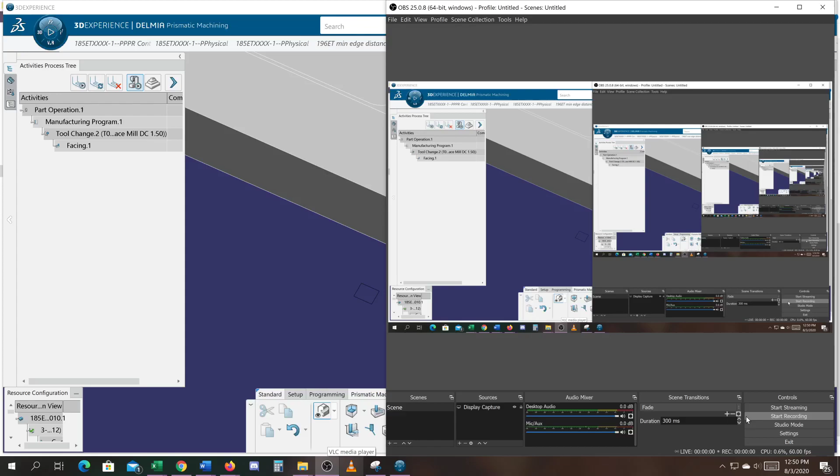Alright, in this demo I'm going to attempt to counterbore that hole. So you don't just take a drill and drill a big hole. What you do is you basically bore it out, or we use the pocketing command to do a boring command to remove material as if it were a pocket.

So what I taught you earlier is you could go to pocket, and remember you got to have manufacturing program 1 active. And then I taught you to go ahead and grab that bottom face and then grab this bottom.

But did you see how that red circle highlighted on the inside? So it's going to think it doesn't want to pocket that. So when you follow through with this and grab the top of the face, by the way, I hid my rough stock. If your rough stock's in the way, make sure to hide that.

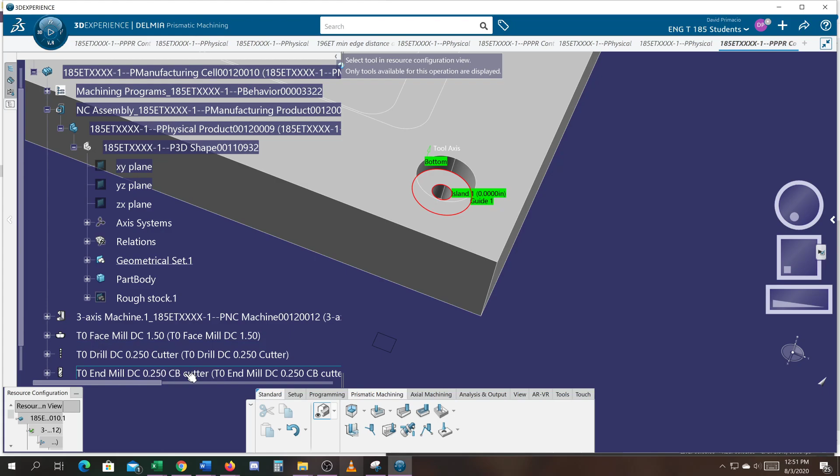Now I got to magically find that close button. Oh, what do you know? I got it. It's all closed off now. And then I'm going to come over here and I'm going to pick the cutter from the list. It's this one here, the one that I put counterbore on. And it says it's good. It's all green.

And I will hit play and it's going to crash because it doesn't know what to do with that red inside circle. Okay, so I'll clear that out and then come back to this mode.

Instead of grabbing the bottom first, what I'm going to do is... actually, now that I'm thinking about it, let's just cancel this.

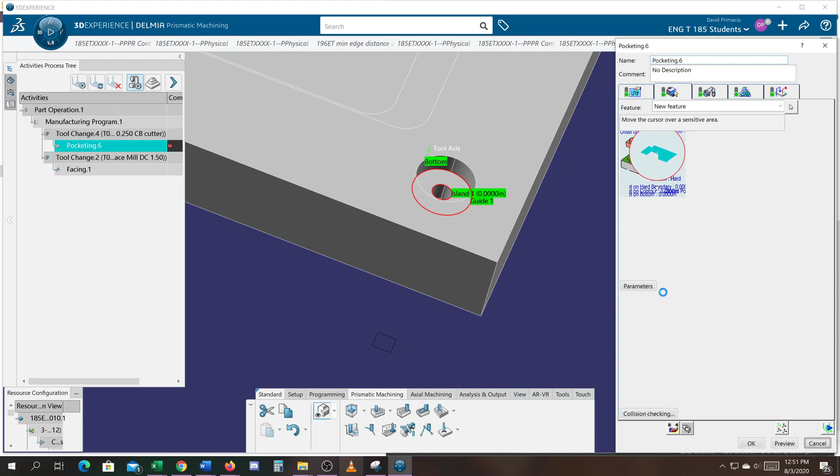I'm going to go back to Prismatic Machining, grab pocketing. I got this tool here. I'm wondering if I can put it inside that tool. Click on that tool so that my tool is already chosen. Okay, click on that one. It was still in there from the last time I canceled out what I was doing.

This time I'm going to grab the side walls and I'm going to grab the edge of that circle so it doesn't consider the inner domain. And then what I had to do, what you have to do is it's asking, do you have any more adjacent elements? You would think it knows it's done because it's a completely closed off circle, but it doesn't. So you got to hit that green check mark to accept that.

And what I did is I created a plane at the same plane as the bottom surface of the counterbore. So when I grab the bottom here and grab this plane, it's still going to work within that circle.

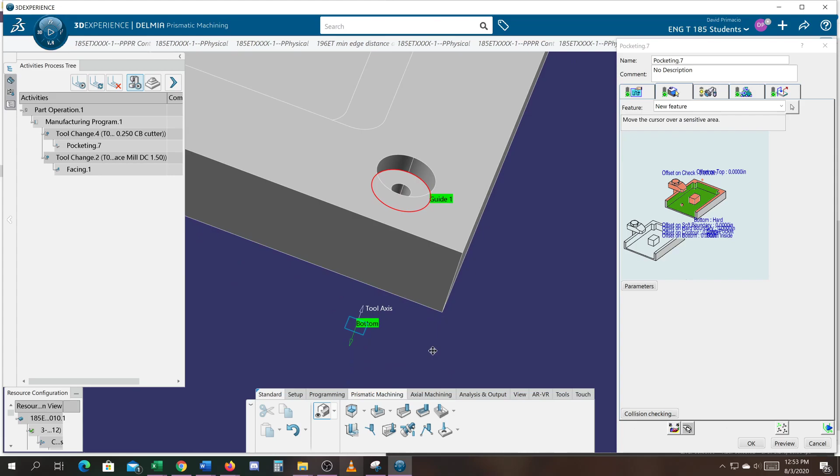Tool axis is pointing up, so that's good. Now the top is the top of that surface, so recognize that outside edge there. Let's put an approach and retract. Normally I pick that rough stock material, but just to make this go faster, I'm going to go and grab that. Okay, and the retract.

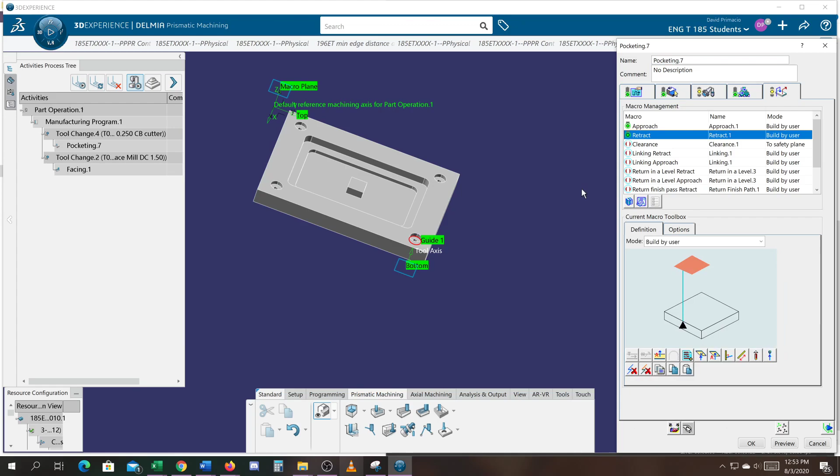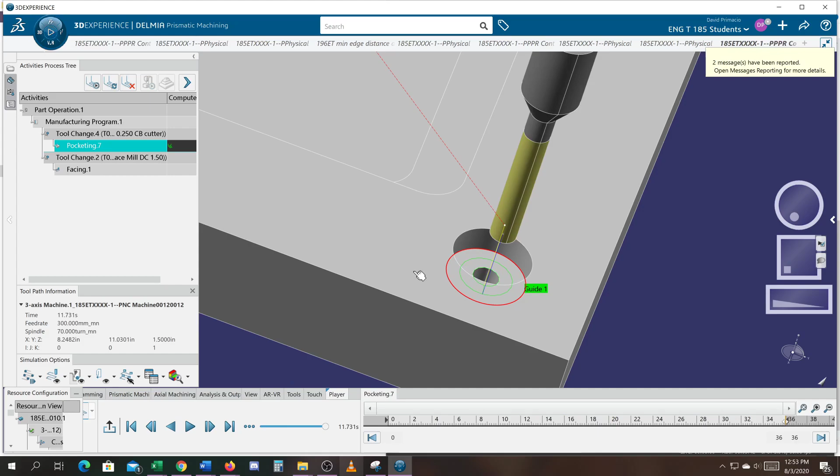Okay, then we have play, and you can see it only seems to make 2 passes and it's done. I increased the size of the circle so we could see what's going on too. Maybe I should have went with the smaller cutter.

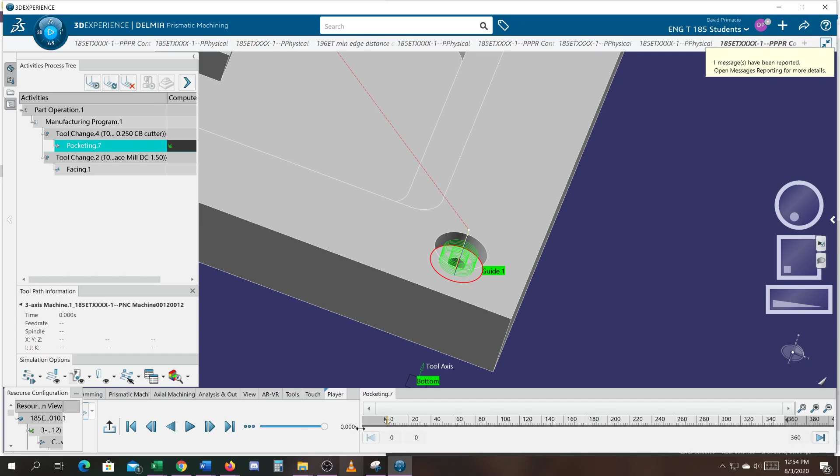I will exit out of this, and under the facing I'm going to make it do 10 cuts just for fun here. Preview that and hit play, and we'll play them cut out here. So you can see it slowly working its way down. It took 10 equal spaces and bored out that hole.

Let's see, am I starting? Yeah, I think it went on the inside and worked its way out. Sometimes it's hard to tell. Let me see if I can find that settings button. Slow this down and hit play. That makes it a little easier for me to see.

I can go ahead and speed it up a little bit. I don't know. Oh yeah, I guess it does. All right, touch the gas pedal there. All right, so that's how I bore out that hole.

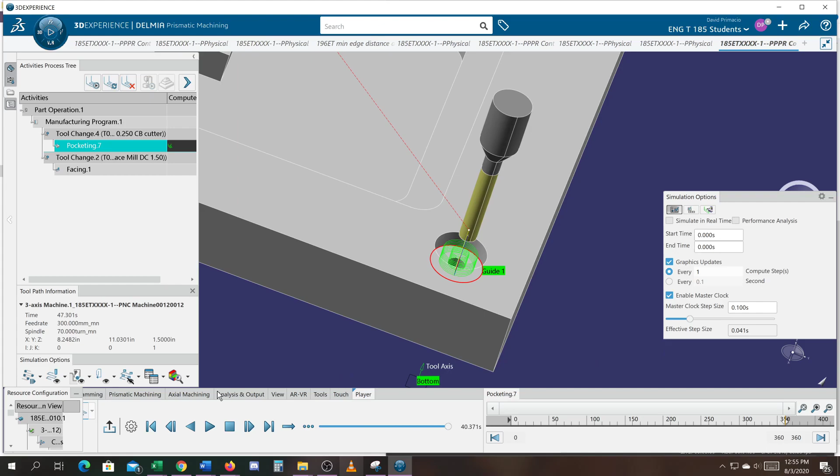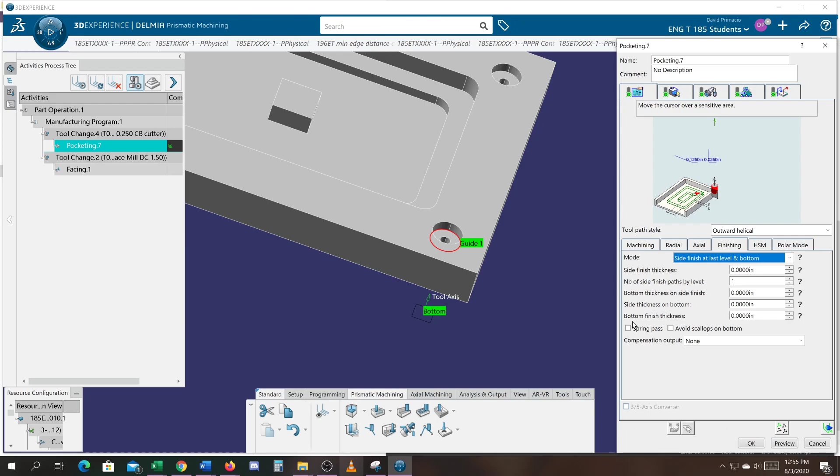Okay, we'll hit exit. And just for fun, let's do a finishing pass. And I'll just do the very last one. So the very last one on the side, at the very last level and the bottom, we'll do a finish pass, which should clean up all the roughness on the outside and the bottom of that, and just make a smooth surface there.

Let's go ahead and hit play. Whew. I think I will adjust that setting to be a little faster and hit play. And I'm just trying to speed it up a notch there. Okay, so that would be a preferred technique of cutting out a hole size versus just drilling, taking a big drill bit and cutting it straight down.

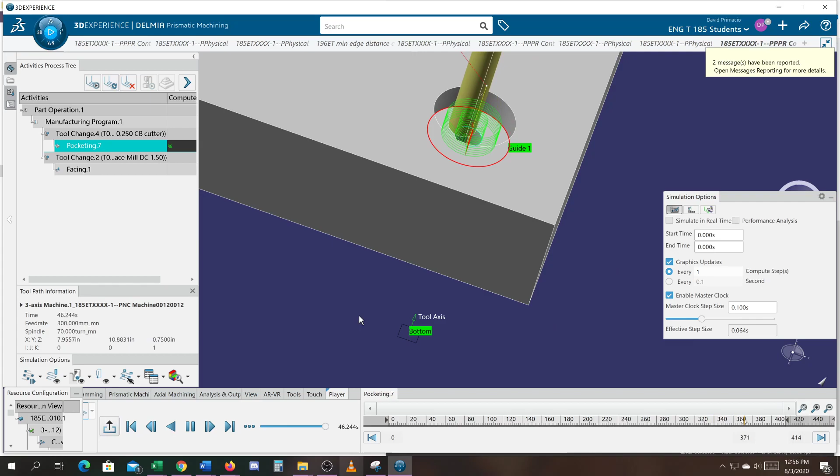All right, so then what we're going to do next, we'll exit out. That's all looking good. Do you remember how to do the other ones? Let's see. We'll go to toolpath, and we're going to pick this one here that I don't think looks like a pattern. I think they should use the same symbol, but or make it bigger. What the hell? It's already taking up all my space anyways.

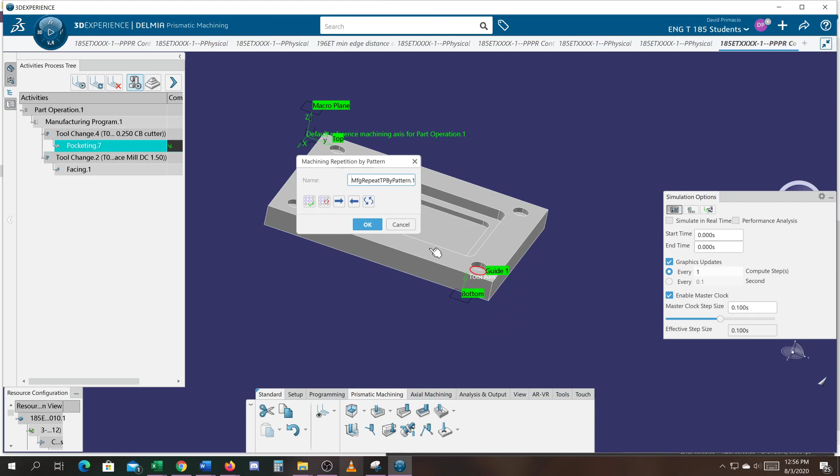So click on that, and then find in our tree the pattern. It finds the 4 bores, counterbore holes. We'll select OK, and let's hit play.

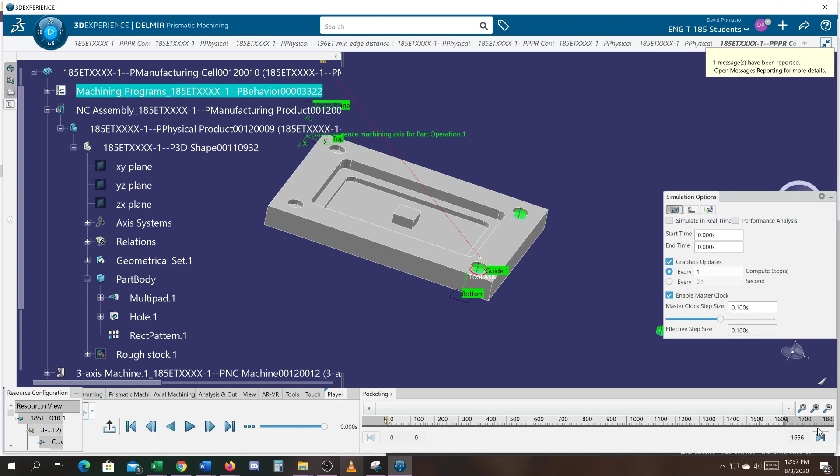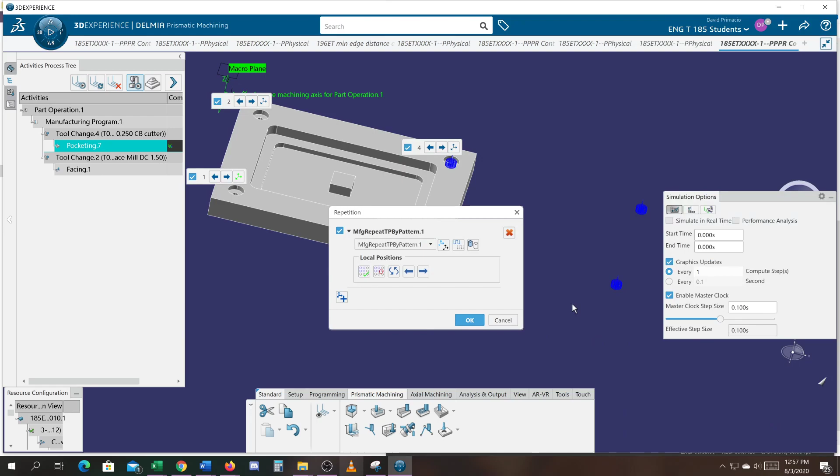Oh no, how did it do that? What happened was when I created the counterbore, I had to inverse it, but why doesn't it know to do that on this one? It's weird because it's showing that it's going to drill those holes out.

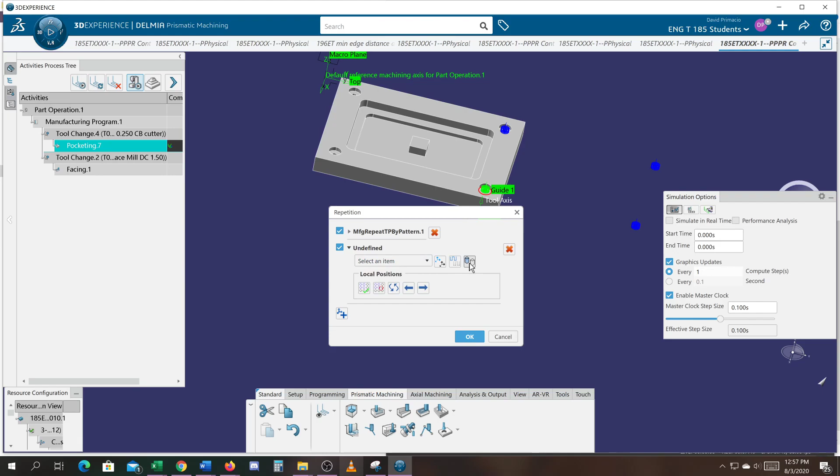I tried to grab that pattern again. It's definitely recognizing where they're at. Oh, I got too many going on. How do I get rid of them now? I've gone crazy with those. How do I remove them? Oh, I see, let's do X, X.

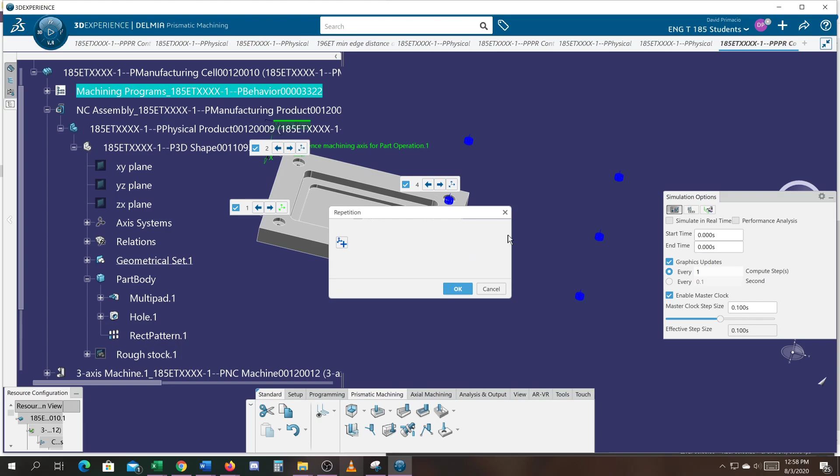We'll add that back, and pick pattern off the tree. I see it's adding 1, 2, 3, 4.

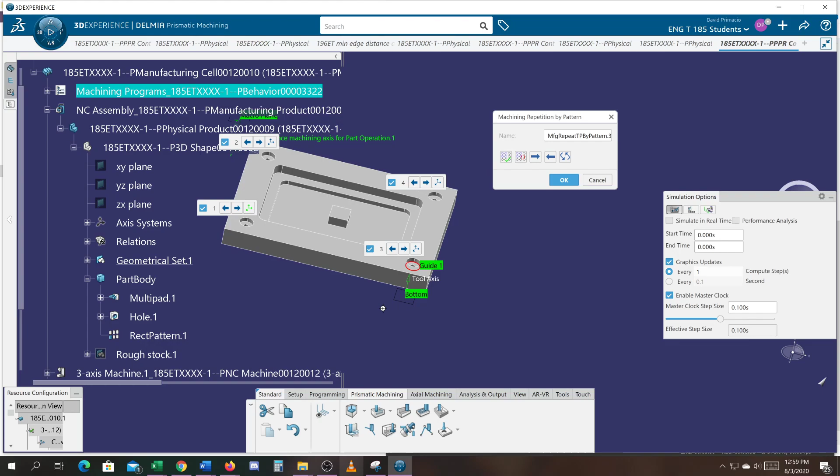Let me try something here. Cancel. I think what I have to do... let this be a lesson learned to everyone.

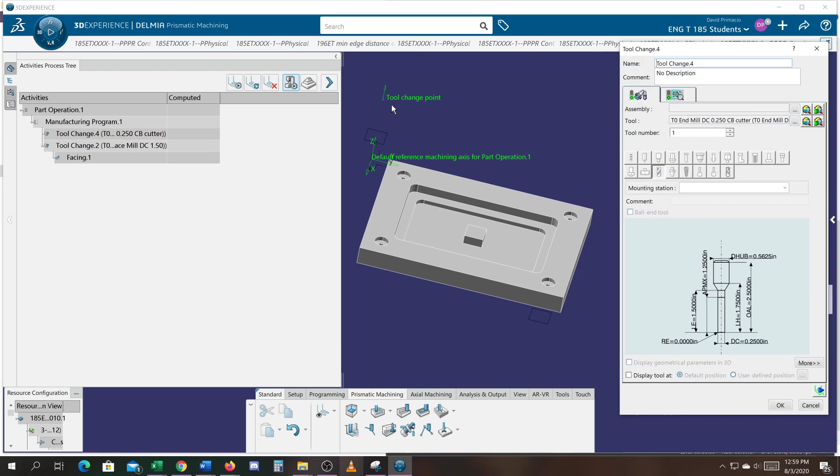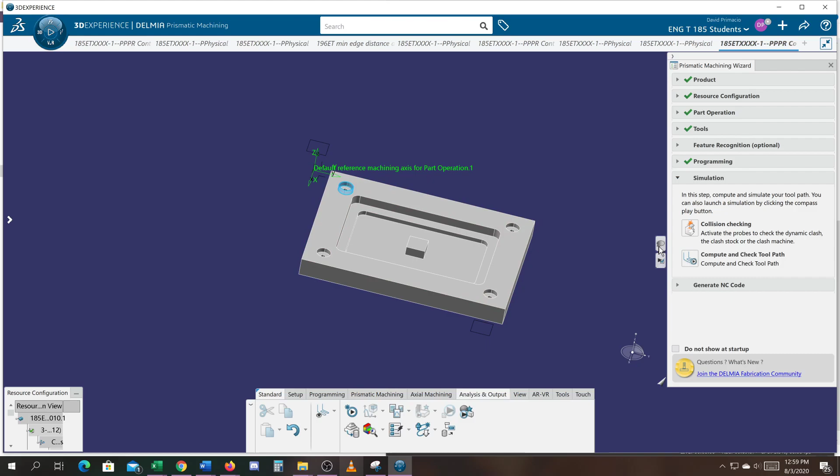I think I drilled this hole, and the pattern goes this way from that hole. I'm just going to go verify that hole. Okay, that hole is this one here, and I machined this one over here. So let me do it again on this one.

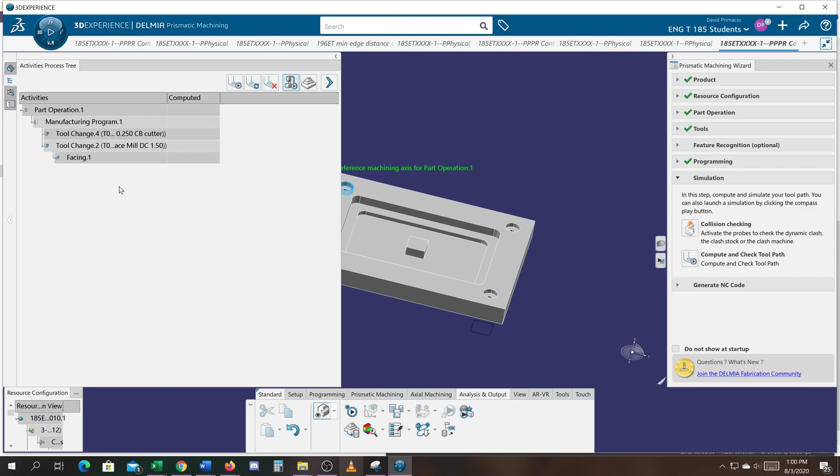Let's delete this out. Select Manufacturing 1. With that active, I should be able to go to Prismatic Machining and do a pocket.

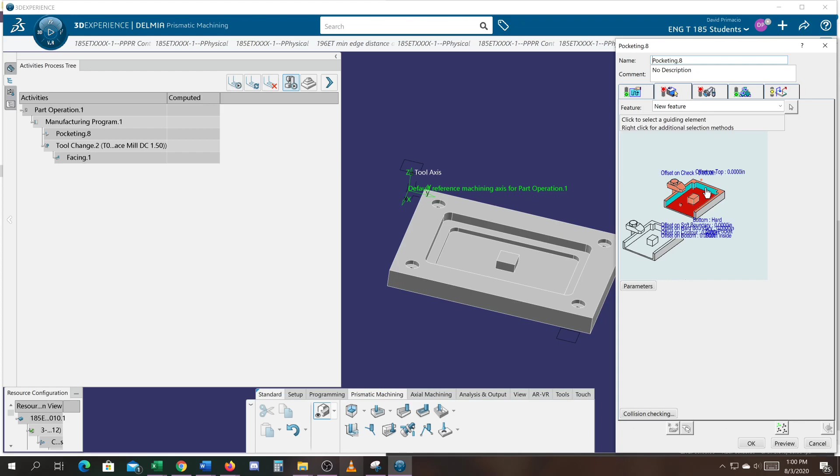To do it right this time, I'm going to grab this wall here, which means to grab this edge here, not that wall. It won't even let me grab the wall. So I grab that edge there so it doesn't recognize the inner domain.

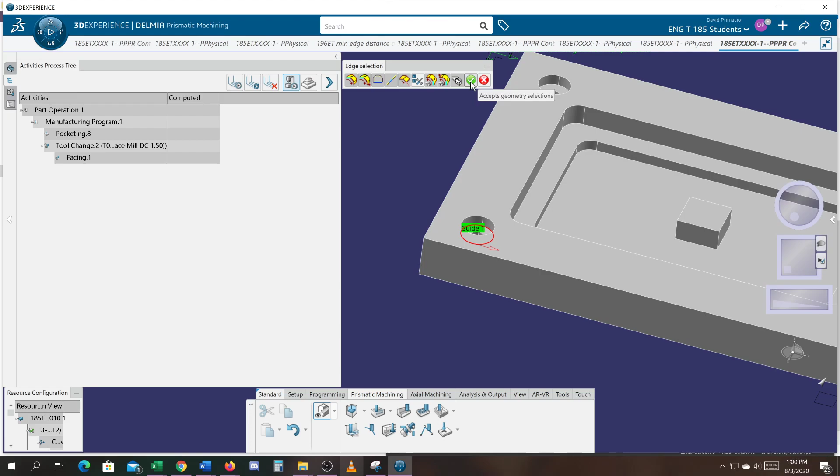I hit the green check to accept that, up there on the very top. This palette here, that green check. Go ahead and hit accept. And then we can grab the bottom. Remember, I created a plane that represented the bottom of the counterbore, and then the top will be the top of this part here.

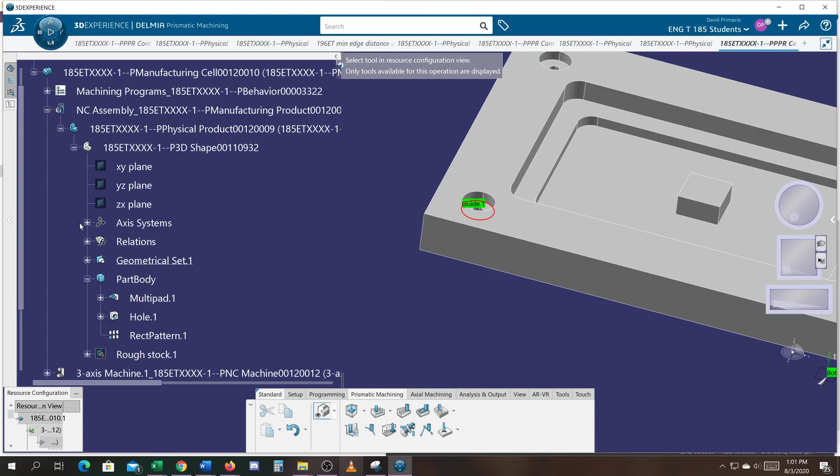Select the tool from the list, which is the cutter, the counterbore cutter. My approach and retract macros, I'll use the same as the safety plane. Again, you might want to use the plane off the rough stock so you're not having to go so high to clear it.

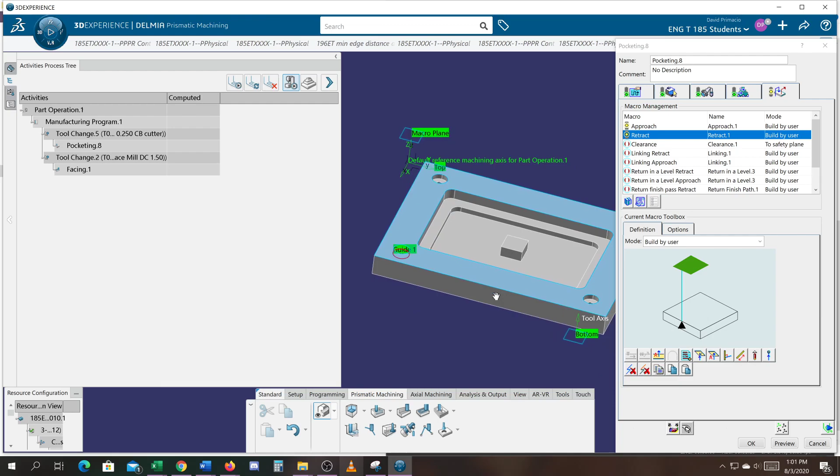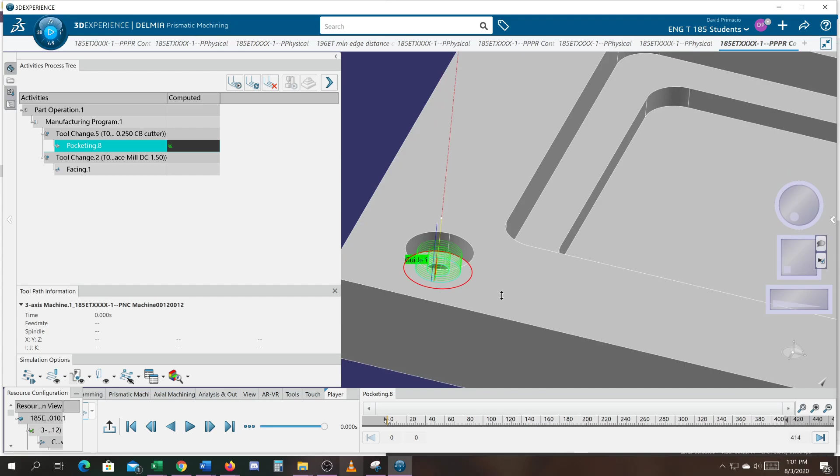Remember, we did 10 levels and a finish pass on this one, the very last one. Let's hit play and see what we get. Alright, that one's working so far.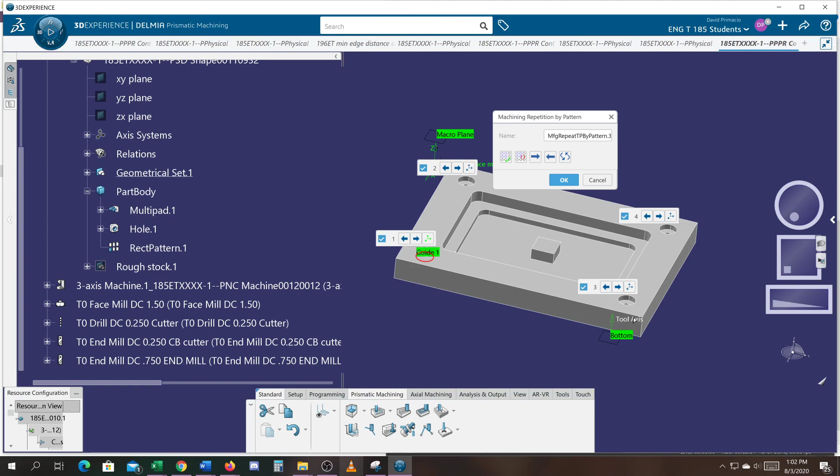So let's go ahead and add down at the bottom here, add the tool path. And then we're going to pick a pattern, right off the tree. The rectangular pattern, 1, 2, 3, 4 holes. The holes look correct. Select OK. Hit OK.

Let's hit play. Oh, this time it's working. Okay, so let's increase the setting, just increasing the speed a little bit. Okay, so we counterbored the holes out.

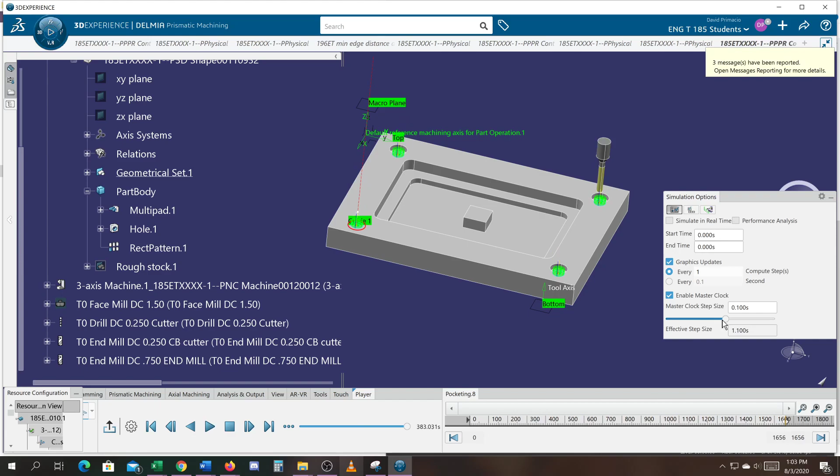Now what we're going to do is drill out the next holes. I'm going to close this off and hit exit. Make sure to say OK, otherwise it won't keep that tool path. Now we're going to drill out the holes. Again, selecting Manufacturing 1, open up the program.

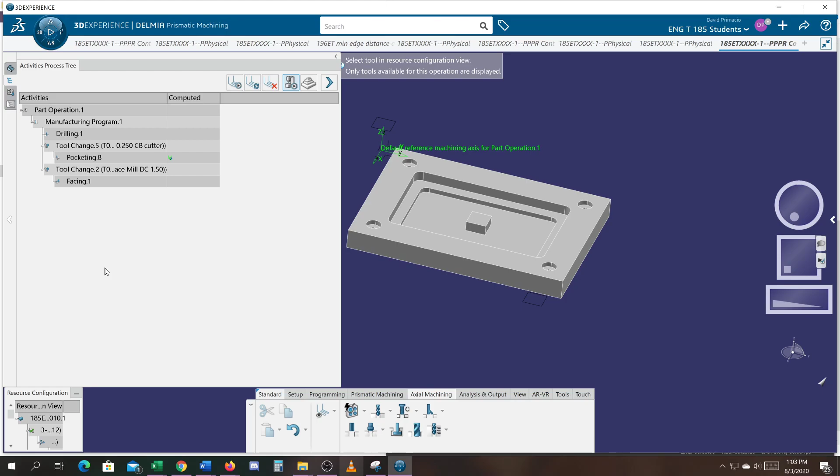We're going to do an axial machining, and I'm going to drill. I wish you'd go to the cutter first - I'm going to do that first, establish my cutter from my list. I'm going to use a 1/4 inch cutter. That one here has the drill symbol.

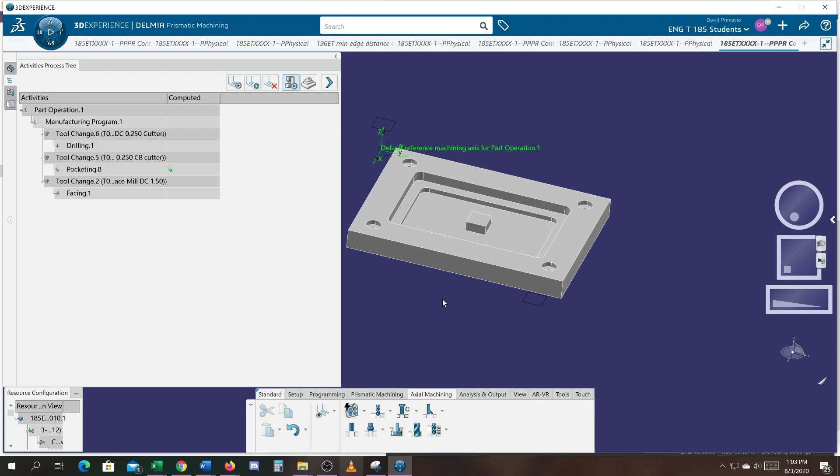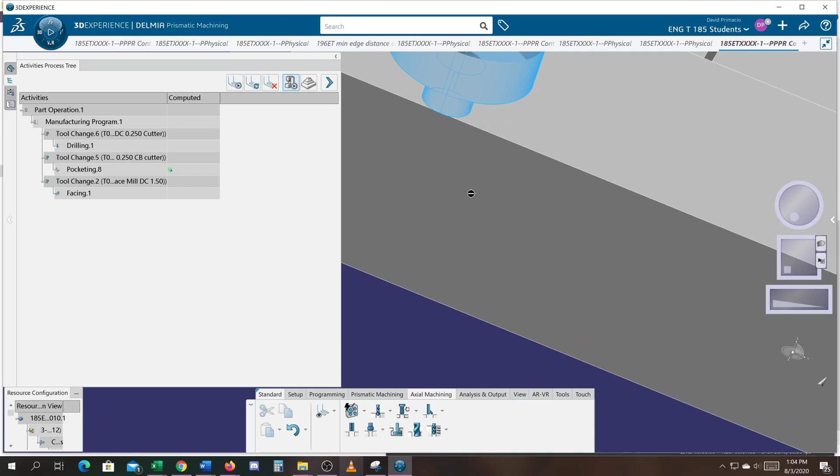And we will select this. Now remember, I want to work to that same hole, so I'm going to grab the inside face of that. Oh boy, I hope that's working. And I still want something... sorry, I always do that. You got to double click the inside hole.

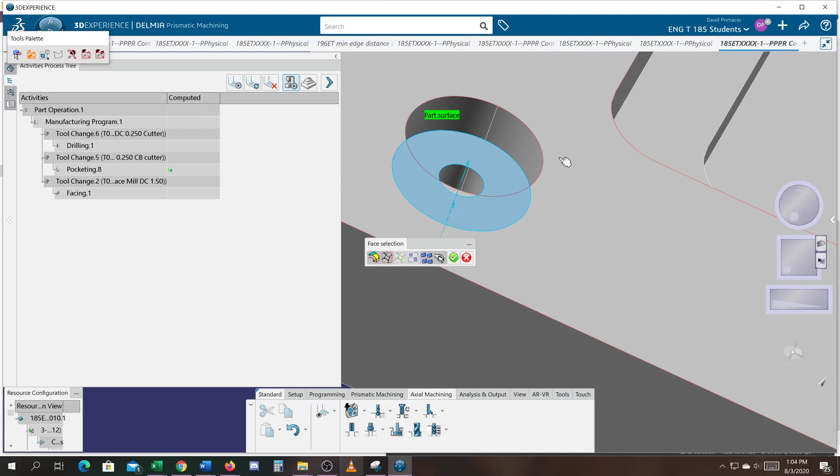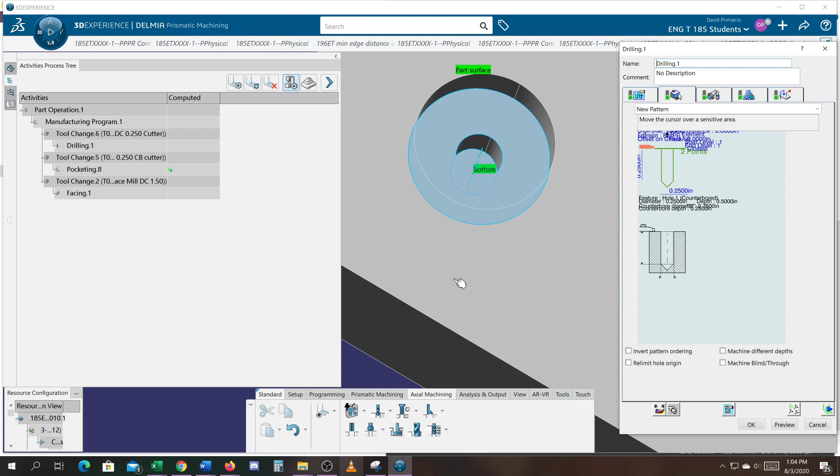This will be the top and the bottom. Since I did a drill, I'm going to get a V in there. I should have - oh, you know what I'd have to do is an end mill on that. Alright, well, we'll have a V in there, so it'll have a V shape to that. That's fine, I didn't design it that way, but that's what they're going to get.

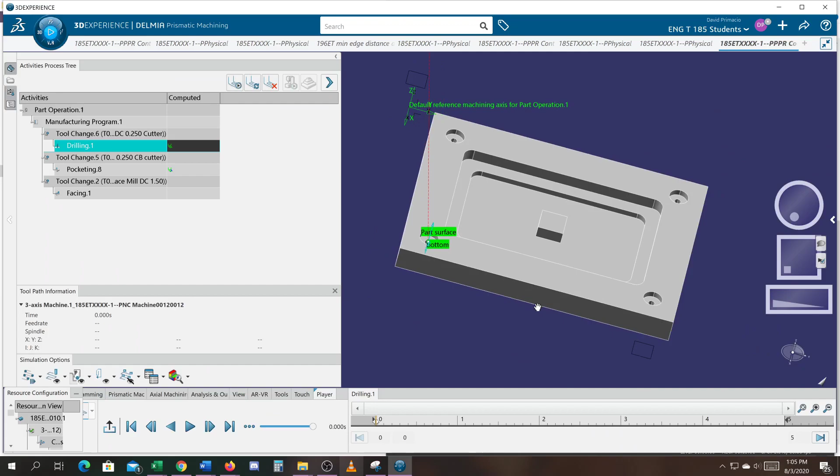And then, in reality, I don't know if we covered this yet, but it would be peck drilling - that's when it goes down a little bit, comes out, goes back down, comes out, goes back down. So I'll hit play, see if it worked. It happened pretty fast, but you see, with no approach and retract, it's going to pound right through my part. So we'll exit out.

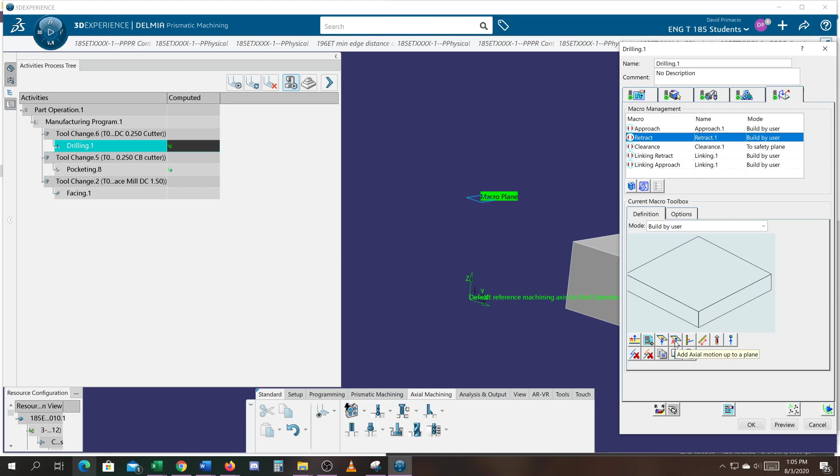Go to my approach and retract. I'll keep really good clearance by going to my safety plane. So I don't have a plane on this one when you're doing drilling - what you got to do is select this A to add the motion, to get that plane to come up and grab this. And then for the retract, we do the same thing: hit this A for the axial motion, grab that plane and grab that same plane. Let's hit play.

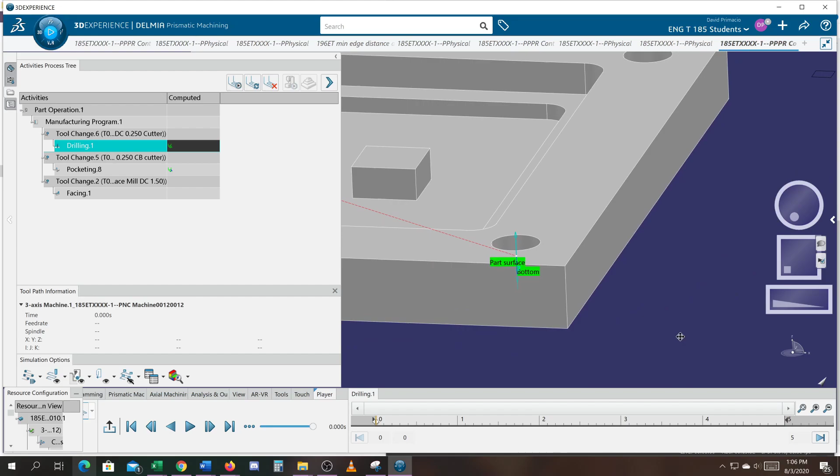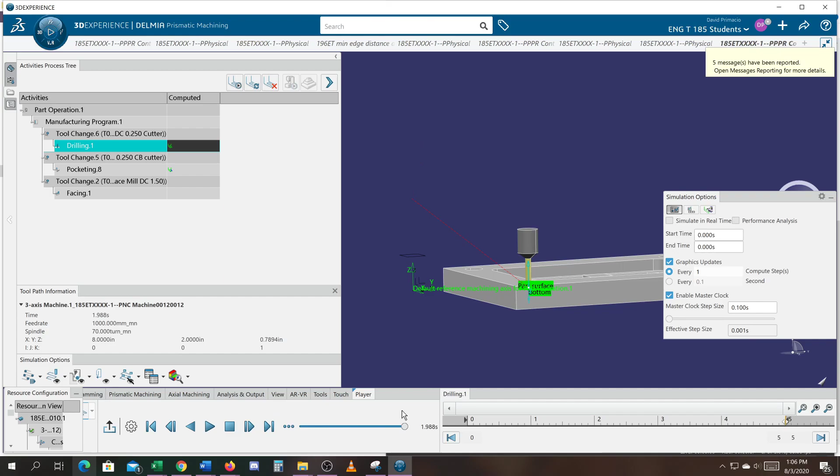Now I'm a little confused - why did that not clear that? Why is it not going up to my clearance plane? I see it drilling in and out, but I don't see it approaching at the same height as my clearance plane. So I'll have to come back to that.

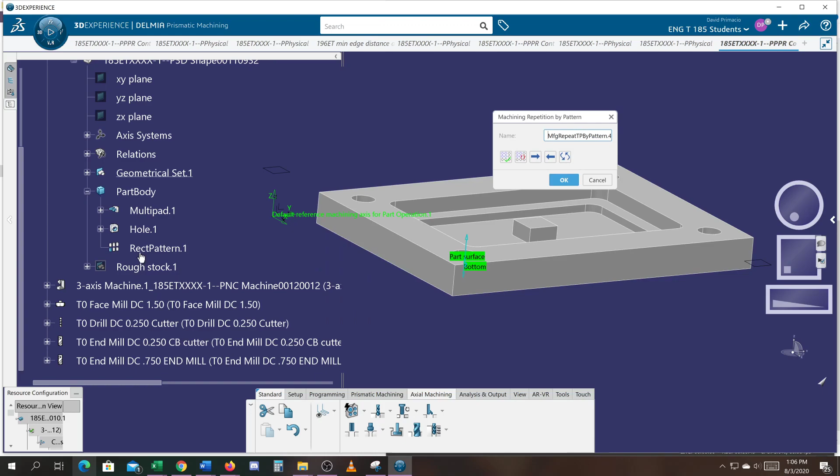I'll minimize this, we'll exit out, and we'll do the pattern thing. Off the tree, we're going to use this pattern here. Pick this pattern - looks like it's going to work like it did for the counterbores. Select OK. Select OK.

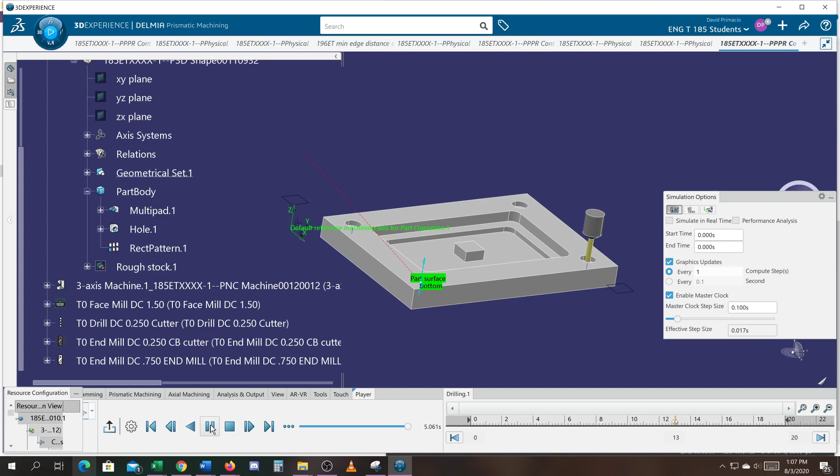Let's hit play. And you can see it hit all the holes. I'm going to increase the size of this so I can find the settings. And hit play. I can't see the toolpath - there should be a red line showing me a toolpath of what it's doing.

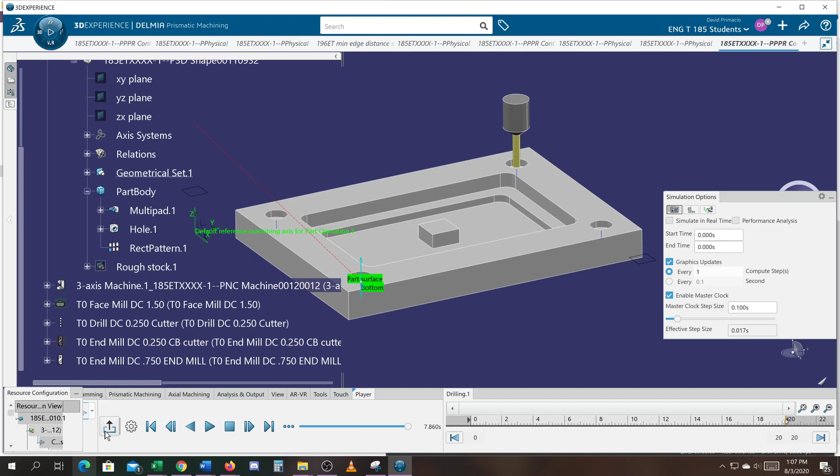Alright, well, I know that the NC programmer is going to be able to deal with it, so I'm going to let it go at that for right now. We'll see if we can't figure out how to get that to go to the clearance plane. Make sure to say OK to keep that. So I've added that step into our program. We have the facing, we have the pocketing for the counterbore, and then we just drilled out the holes. The next step is to create the pockets with this pad sticking up in the middle.